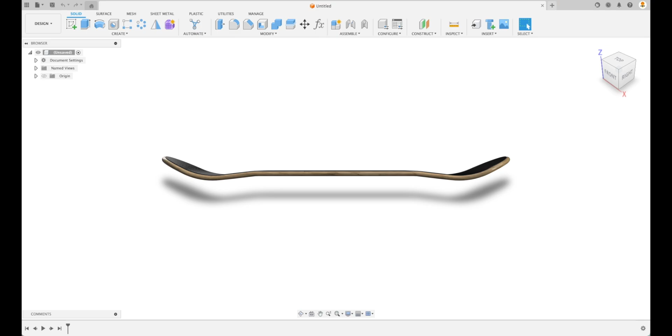So the first thing we need to do in modeling a skateboard is insert a canvas. So what is a canvas? It's an image, and I'll put one on the screen right now, of a profile, in this case the side profile of a skateboard that we can work with.

Now you can find this particular image on our official website. A link can be found in the description below. We encourage you to download it and use it along with creating the skateboard.

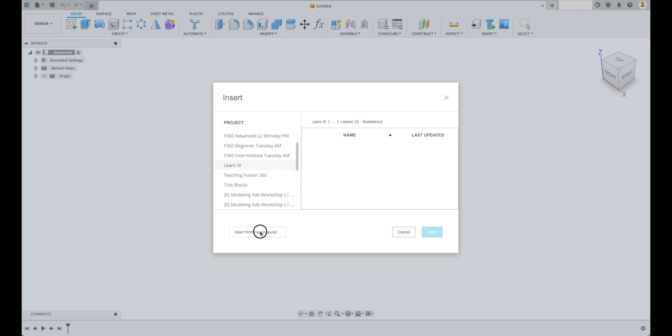We're going to go over here to Insert and insert a canvas. Let's find that, insert it from my computer. And there it is. We're going to pick the front plane, or the XZ plane.

So let's make our skateboard bigger. We can grab this handle right here, which adjusts the scale in both X and Y. Don't worry about the specific number, we're going to calibrate it in a moment.

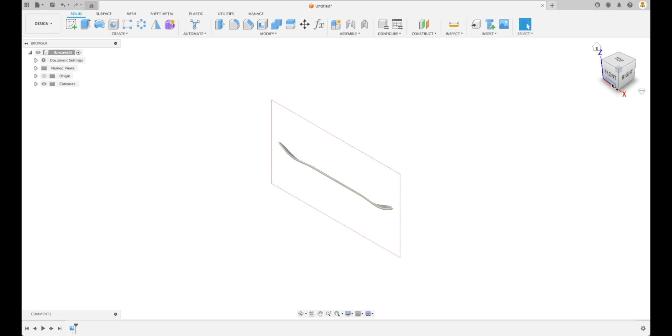Now what we can do is off to the side here in our browser, we can go to our canvases and right click that image, that canvas that we brought in. We're going to go Calibrate. This is a really cool feature of Fusion, we can calibrate this image to the correct size for our skateboard. So we're going to pick one point and pick the end point there.

And now we can specify a certain number. So I did some research about sizes of skateboards, and this particular one we're going to call 31.12 inches. All of a sudden our image gets a lot bigger, and of course this is all in perspective, so when we zoom out it looks exactly the same, but indeed what we have right now is the correct size for our skateboard.

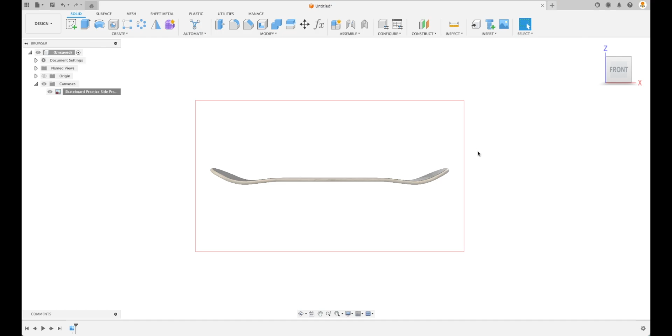Now let's create a sketch on that exact same plane, the XZ plane. Now there are many different ways of doing this. I'd like to just show you one very easy way to create this whole skateboard here.

We're going to create a line, and it's going to be from our center point. So let's just create a center line first of all. Let's press Escape, and let's make this line by selecting it and then pressing X into a construction line.

Now what we're going to do is just follow this one side of our profile, and then we're going to mirror it to the other side. So let's just grab the bottom of it.

Now here, one thing to take note is right now I'm snapping to the grid. So you can see that my mouse cursor is snapping to the grid. If I don't want it to snap to the grid, I can hold down Command on a Mac or Control on a Windows computer to make it so that it no longer snaps.

So I can find this point of our skateboard, and I'm just going to imagine that there's going to be some theoretical sharp points. So let's go from there to there, and then press the check. And now what we can do is move this point so that it's approximately in line with our skateboard.

We're following more of an artistic approach here where we won't apply any dimensions to our skateboard other than calibrating our canvas. But what that means is that we have a little bit more flexibility to have an artistic rendition of the skateboard.

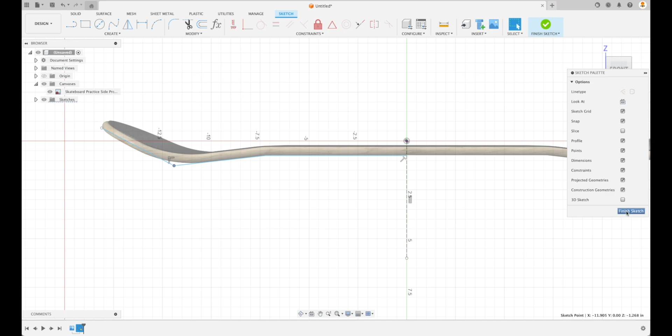Now what we can do is go to Mirror, and we're going to pick those three lines. So instead of picking them directly, I am just going to double click and it will pick that entire chain for us, which is a whole lot easier. And then our mirror line is going to be the one that we created, and it will create another chain on the other side of our mirror line.

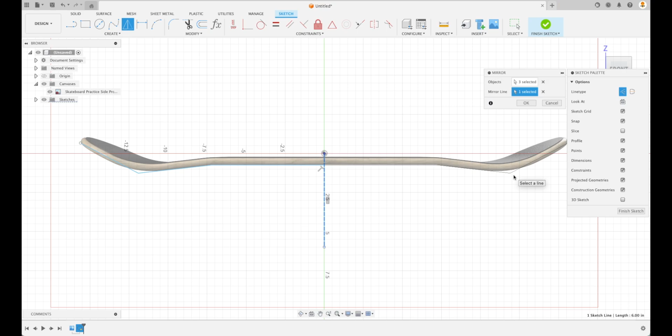Let's finish our sketch now and hide the canvas. Now we've got the profile of our skateboard, in which case we can go to Extrude.

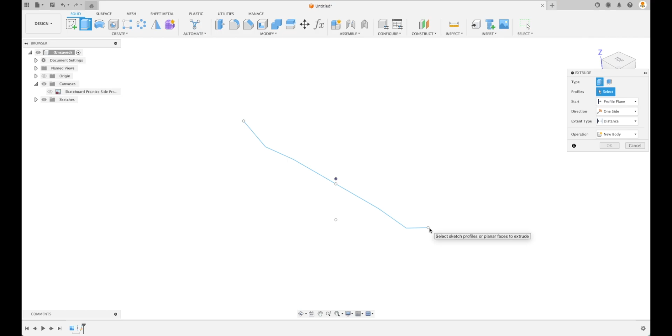Usually what we need for Extrude is a closed profile, meaning it can't just be single lines or single edges—it needs to be closed. But with Extrude, under Type, we can go to something called Thin Extrude. It extrudes a thin wall along selected open or closed profiles.

Let's pick that, and we can pick one profile, two profiles, and extend it. Now I want the center point of our skateboard to be the origin, so I'd like to extrude it in both directions—let's go to Symmetric.

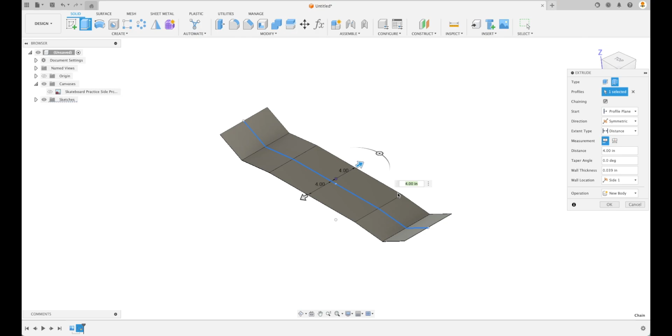Now you can see it's 4 inches to the right, 4 inches to the left. But I'd like to go whole length, meaning it's 4 inches total. Now I'd like to apply a total measurement under whole length of 7.75 inches. And there we go—let's go OK.

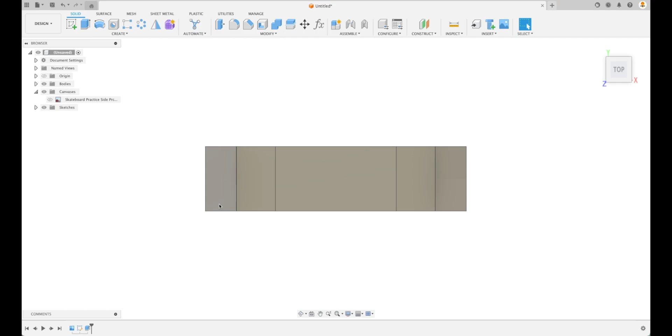So now we've got this basic profile of our skateboard, which is looking really good. Now we'd like to create the top profile—if we look at the top, we'd like to cut off the edges and make it look good. So let's go back to Sketch and pick the XY plane.

I've created this sketch on a plane, but it's got no geometry on it. I'd like to take all of this geometry, even though it's 3D, and project it to that sketch plane. How can I do that? Let's press P for project.

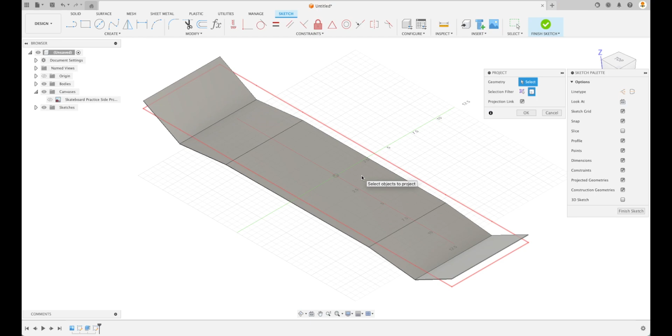Under our selection filter, we've got specific entities, meaning I can pick specific edges or faces, or go to bodies. Let's pick bodies, and I'll pick this entire body I just created. There we have it—we've got this projected rectangle on our sketch plane. Let's go OK, and finish our sketch right there.

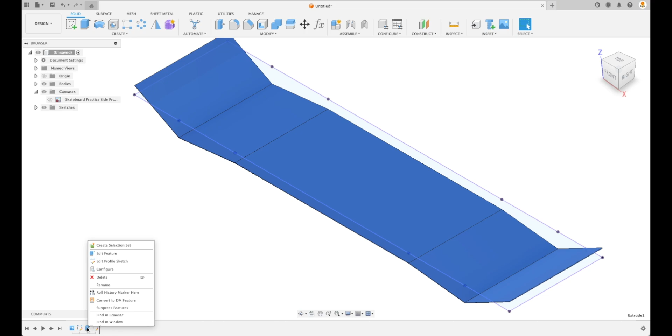Now this is interesting—I forgot to do one thing. With our extrude, you can see our skateboard is really thin right now. So let's go back to our extrude in the timeline, right click, edit feature, and make our wall thickness a little more reasonable.

I'm going to type in 3/8 of an inch—you can type a fraction if you like, 3 divided by 8. And there we have our body, and of course everything will update automatically as well.

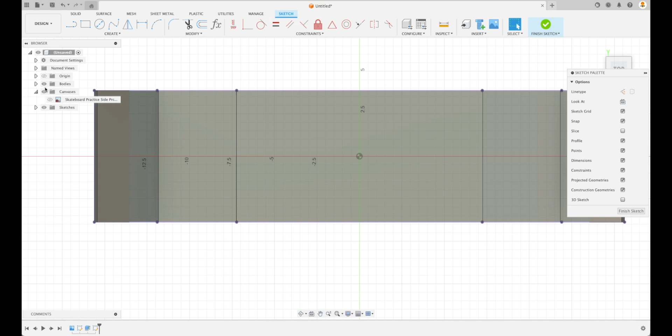Let's go back to the sketch we just created. I'm going to hide the body that I've already created, and there's our profile—that's the complete outer extremities of our body, and that's exactly what we want to work with.

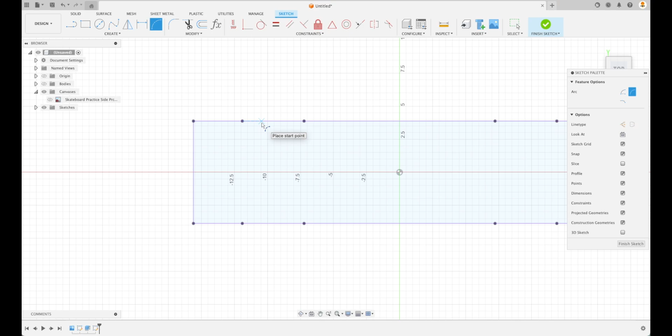Now I'm going to create some arcs. What I want to do is just make sure it doesn't snap to anything other than the line—so I don't want to snap it to an end point or a midpoint. Just be careful of that. Remember, as we hover our mouse over any tool, it tells us what to do.

In this case it says place start point, so let's go there. Now hover our mouse—it says place end point. Let's do that, and then place point on arc, so we can pick our line right there. We can even go to the midpoint there.

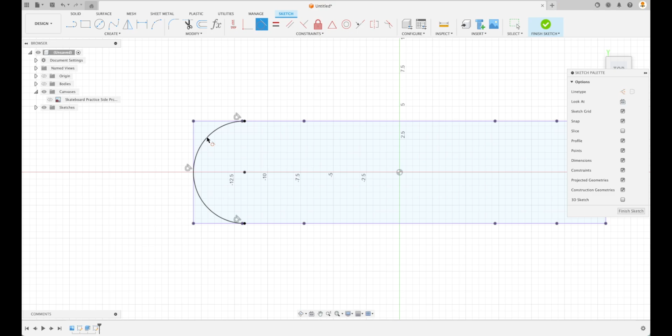Now we have to apply some constraints. Let's go tangent constraint—we're going to pick our arc, then our line, our arc and our line, and our arc and our line again. And there we have it—everything is constrained.

Now to mirror this to the other side, we need a mirror line, so let's create that. I'm going to create a line from there to there, and turn this into a construction line, just as a reference line. Now we can mirror this arc with our mirror line, and it will apply that arc to the other side as well.

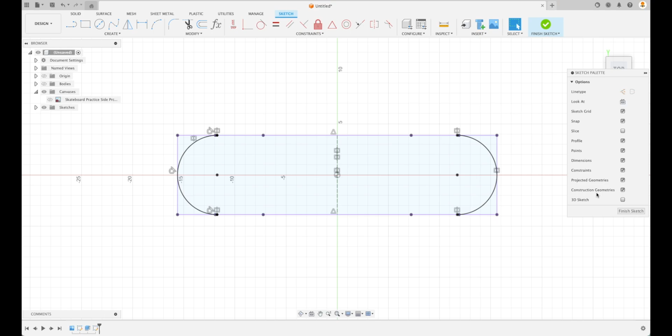Let's go finish sketch. Now what we're going to do is talk about something else that's overlooked a lot in Fusion, and it's a really cool feature to utilize often.

So let's go to extrude, and we're going to pick that entire profile. If you have to pick several profiles, that's because you've created a sketch perhaps on a face of your skateboard before. I created it on the XY plane, so it creates one single profile. But if you have extra profiles, just pick them all.

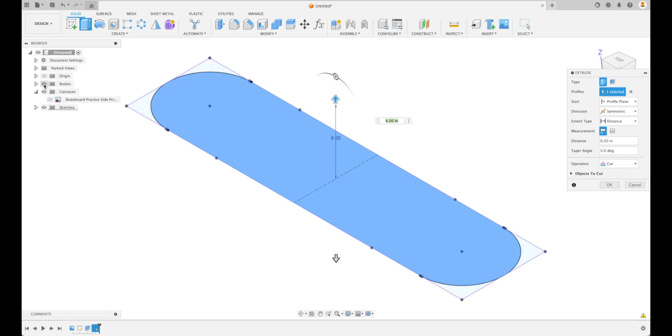Now we want to go to Symmetric and just make this a random size. It's saying that we can't see the body right now, so we need to toggle on bodies. And there we have it. So we've got this cutout going on right now with our original body that we created.

Now, this is the feature that we want to teach. Under operation, it defaults to cut, but we want to go to intersect. And look what happens when we click it. Well, the two bodies, where they intersect, it's going to create or keep that original body. So this is a really cool tool to use.

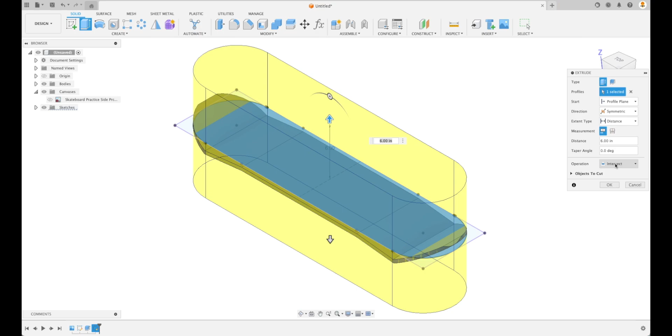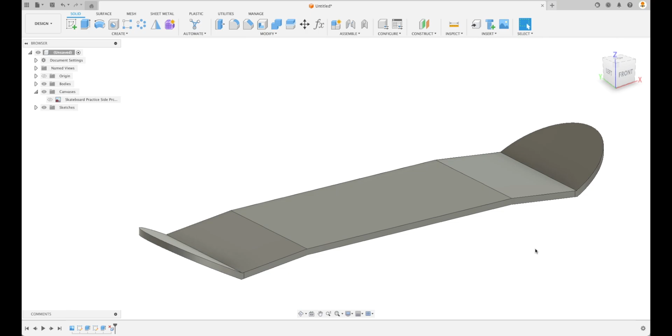So let's go OK. Now we can slowly refine our skateboard. I see that on the ends we've got these little flats. Let's pick both of them. We can pick multiple faces by holding Command on a Mac and clicking, or Control on Windows. Now just press the Delete key on your keyboard. And look at that. Now they're completely gone, ready to proceed.

Some people, they'll right click and they'll go to delete, and it just creates more problems. Just press the delete key on your keyboard. It's the easiest way. Now let's apply some fillets.

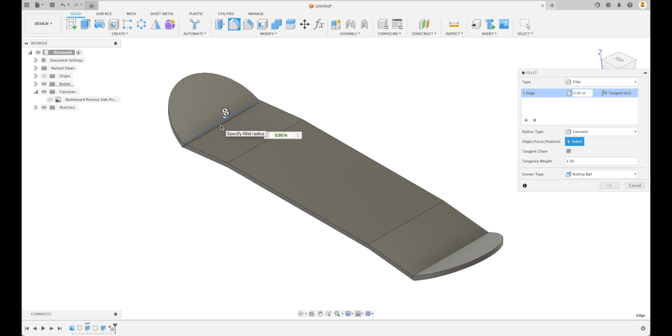I'm going to select the through edges as well. Pretend that we have X-ray vision. We can pick through our model. So let's pick that. And I'm going to pick all those edges. There should be 8 of them.

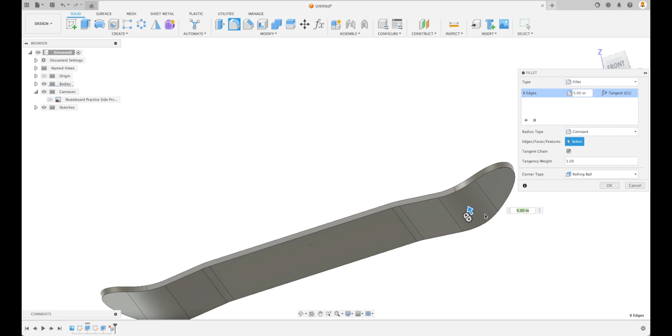There we go. And now let's add, again, we're kind of in an artsy mode right now. We don't have specific dimensions, so I'm just going to estimate. And I think around 5 inches looks pretty good. And because I picked the edges on the other side, now we've got this beautiful shape to our skateboard.

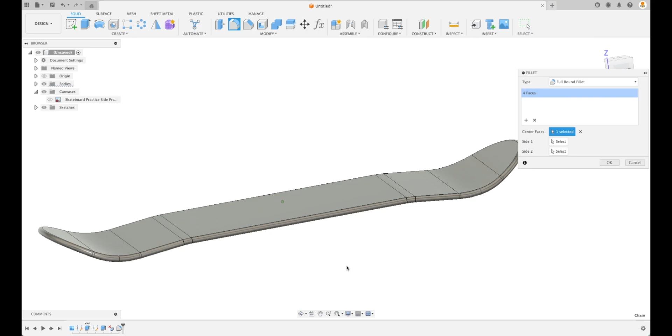Let's go OK. Now we're going to add another fillet, and we'd like to round over all the edges. So let's go over here to full round fillet, and I'm going to select this face. The top and the bottom will turn blue. That's what we're looking for. As soon as we click on it, it will put a nice full round all the way around our skateboard. Let's go OK.

So now what I'd like to do is add some grip to the top surface here. So in order to do that, there's a bunch of different ways, but I'm just going to show you one new way that you may not be familiar with. And we're going to have to go into surface mode. So make sure to go to surface mode.

And what we're going to do is open up bodies. We're going to right click, copy, right click, paste. And now the second body, an exact duplicate of our body, will be pasted, and it's in our timeline as well. So now what we can do is hide the first body.

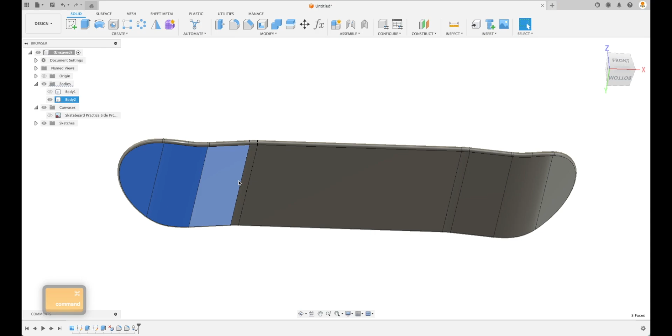And what we're going to do is delete all these faces. Now, again, we have to be in surface mode. If we're in solid, look what happens. I'm just going to try and delete these faces and press delete. And we get an error down here, and it's saying that it's failed to compute. So that's because we're in solid mode.

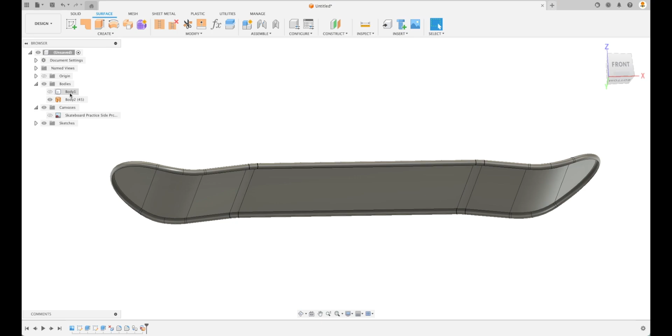We need to go to surface, and what we can do is delete all of these faces. So let's just do that. I'm going to press delete, and now we've got this hollow body right here. Actually, it's a body that's missing the bottom faces, and it's actually now a surface body rather than a solid body, which is right here. So in order to finish this off, we just want to keep the top faces. So I'm just going to go around and delete all the other faces.

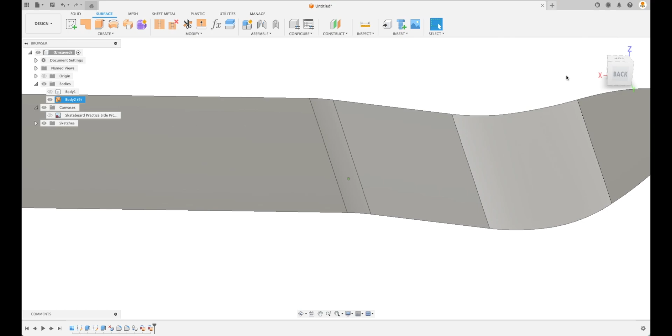Once we've selected them all, press delete. To pick more than one entity or face at a time, hold down Command, and you can see that in the bottom left of the screen, because I'm using a Mac, or Control on a Windows computer. So there we have it.

We've got this surface for our skateboard. Now we can go to Create and let's thicken it. We can pick those faces and add some thickness to it. So let's add something like 50 thou. That looks about right. We can go OK.

Now we've got Body 1 and Body 3, which is our grip, and you can see there's a little bit of volume to it. Now, just for fun, let's rename these. I'm going to rename Body 1 as my skateboard and Body 3 as my grip. Perfect, so this is looking really good.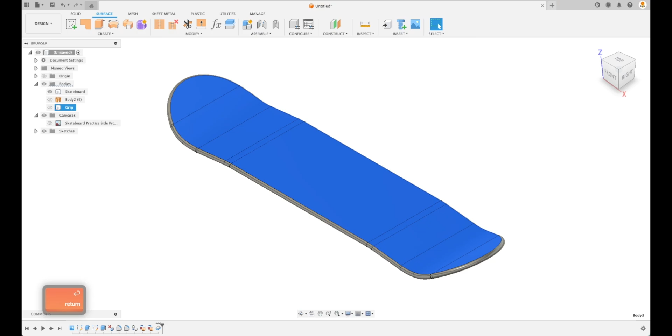So there's one more bonus thing that I'd like to finish off this tutorial with.

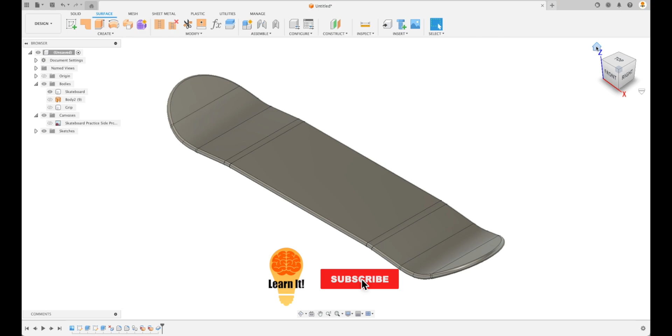Now let's go on to the final thing we're going to learn in our tutorial today, our bonus item. One reason we've created a skateboard body and a grip is because we'd like to apply an appearance to either of them, and it's a whole lot easier if we have two bodies than trying to apply an appearance to individual faces. So let's go A for appearance.

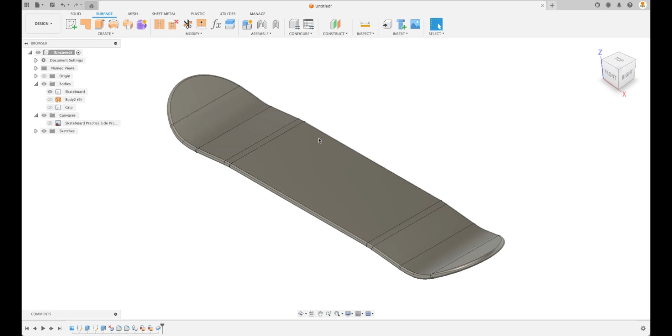Again, if we can't remember that shortcut, we can always right click on any body - let's close this first. We can right click on any body and there's appearance, and there's the shortcut right there, A. So let's press A again. Now let's go down to wood, and I'm going to apply something like oak glossy. We can drag this right on top of any body in our browser.

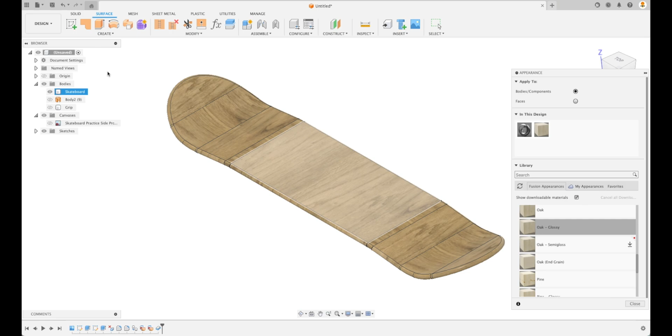So I'm just going to put it under skateboard right there, and now everything turns into that oak. And there we go, we've still got grip.

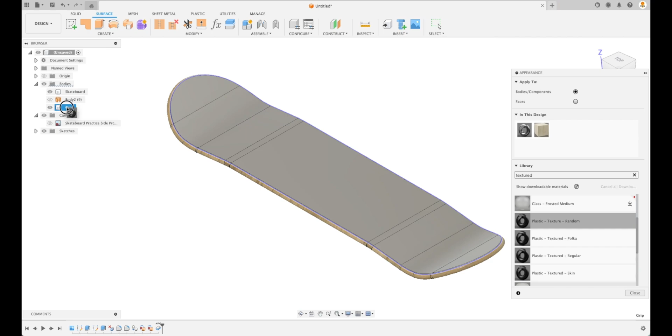For grip, I'm going to type in textured, and under Fusion Appearance Library we can double click that. Right down here, I think I really like this plastic texture random. Now, again, the top surface is not going to be plastic in real life - it's a different material, but we can still use these as the basis for our appearance. So I'm just going to drag this and drop it under grip, and this is looking really, really good.

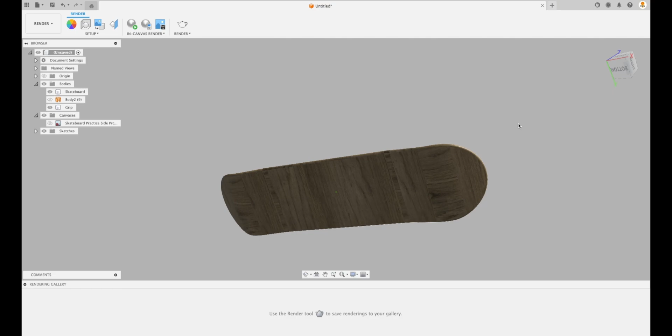Now you can see there's some issues though. If we flip this around, you can see that our texture or appearance here is scattered in all different directions. So how can we fix that? Well, let's go to Render, and now there's a really cool thing under the render mode or render environment - here we can go to texture map controls.

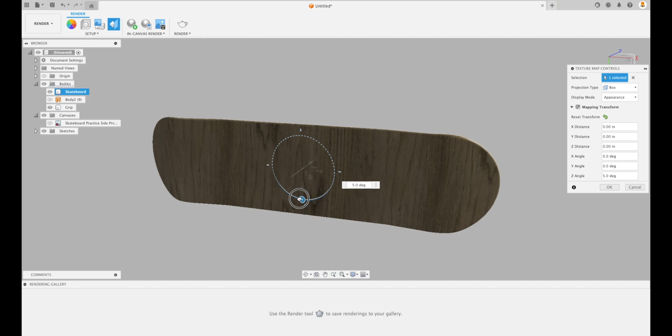What we're going to do is select a body, and now for projection type, I'd like to encourage all of you who are learning to go to different modes here. But let's pick box and see what happens. Now all of a sudden the grain is going that direction. We can rotate this if we want - there we go, let's rotate it to 5 degrees. And now this is looking more like an actual skateboard.

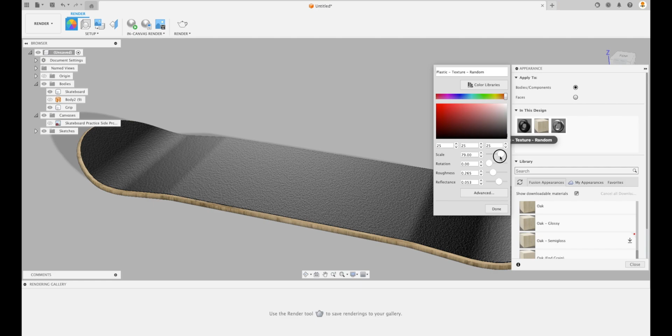Let's go OK. Now we can also change the top as well. Although the top is looking really good, maybe in real life it would be a little bit more textured than that. So let's press A for appearance again, and now we can go to plastic texture random. Let's go edit, and under scale we can make it finer or larger. This is looking probably a little bit better around 79%. Also, it's reflecting a lot, so I'm going to turn down reflectance because in real life this is not really reflectant at all. And let's go done. So at this point, you could render your skateboard.